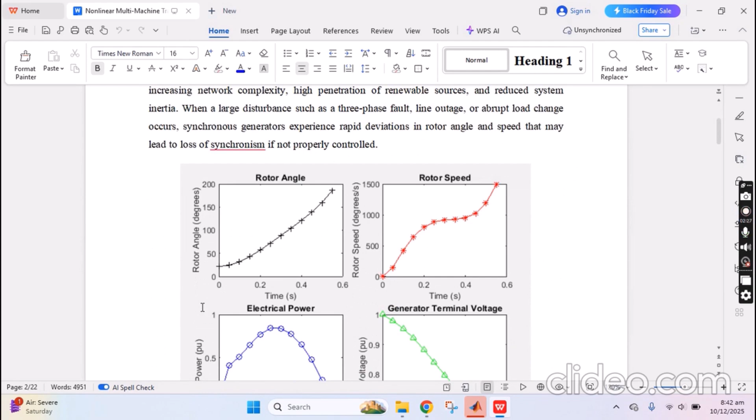I have written the complete abstract with the keywords and introduction. In the introduction, I added monitoring of rotor speed, its angle, generator terminal voltage, and its electrical power.

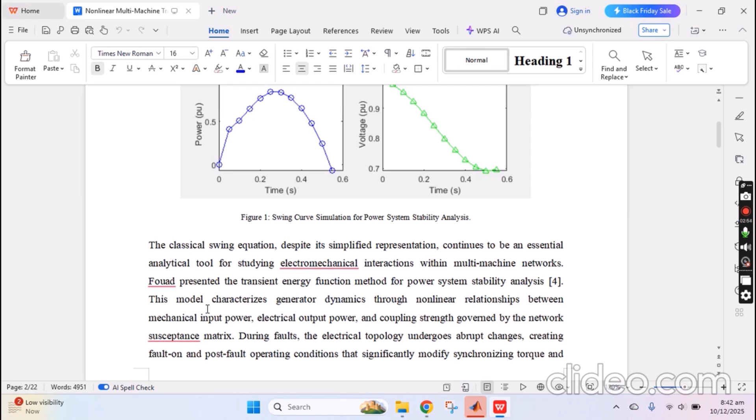During power system stability analysis, we used the Fouad algorithm. Fouad is one of the scientists who presented the transient energy function method for power system stability analysis, and in the model, generator dynamics through nonlinear relationships between mechanical input power and electrical output power, with coupling strength governed by the network susceptance matrix.

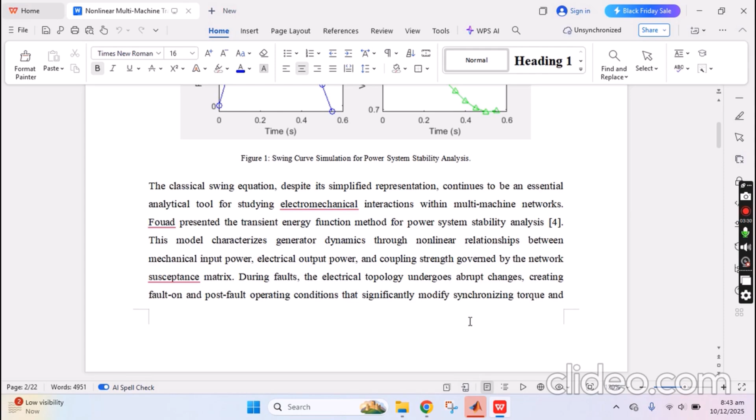During the fault condition, we also consider that the electrical topology undergoes abrupt change, creating fault-on and post-fault operating conditions that significantly modify the synchronizing torque and damping as well.

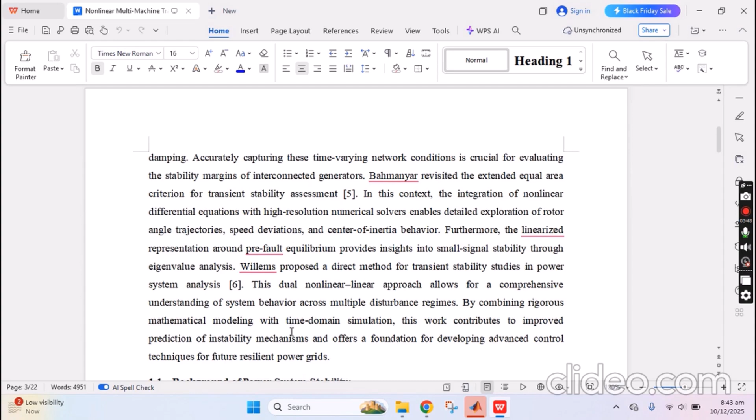Here is the complete introduction in which I detail how we linearize the representation around the pre-fault equilibrium, as well as the instability mechanism, which offers a foundation for developing advanced control techniques for future resilient power grids.

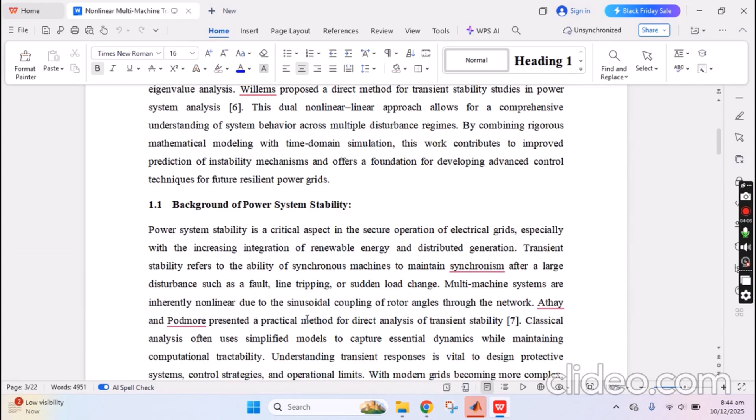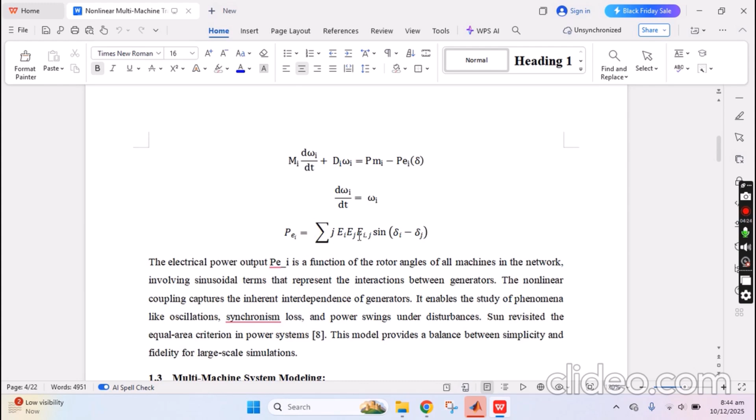Here is the background of power system stability and the classical swing equations. These are the equations I used for the power output results, for the rotor angles, and for the angular velocity. This is the multi-machine system modeling.

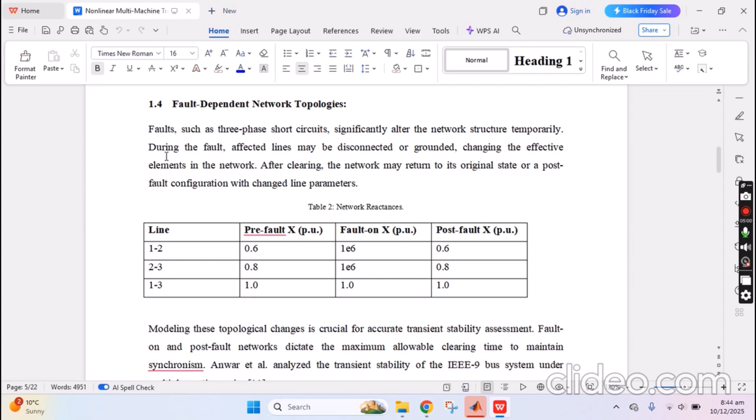These are the machine parameters used in our case in terms of susceptance, fault-dependent network topologies, and the fault dependent networks. The fault dependent networks provide the complete three-phase short circuit network topology, and during fault conditions this occurs during disconnection, grounding, or changing the effect of elements in the network.

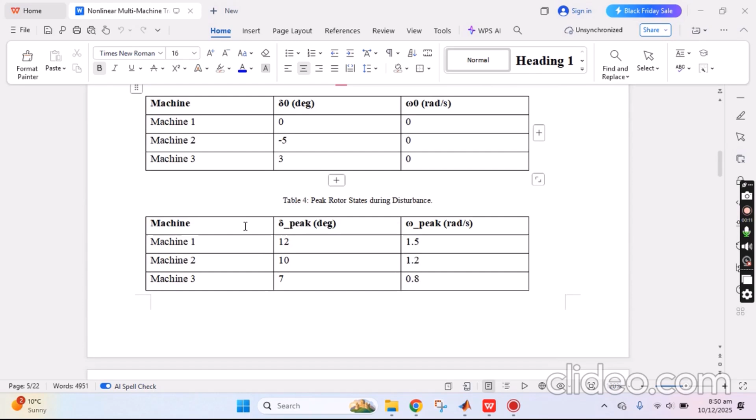Here is the table with pre-fault rotor states and peak rotor states during disturbances, along with the nonlinear dynamics and stability assessment according to swing curves of machines for various current ratings.

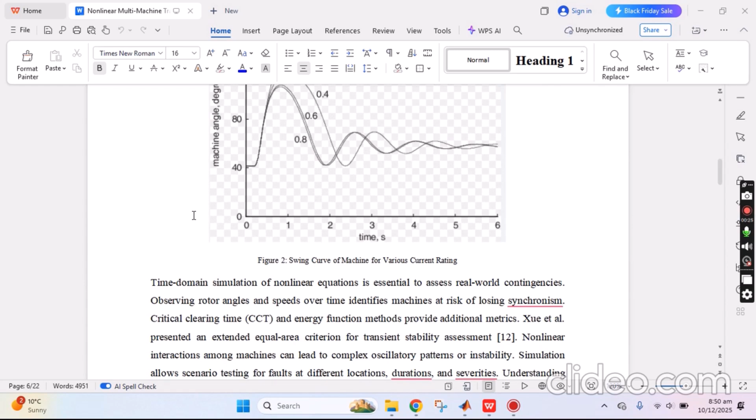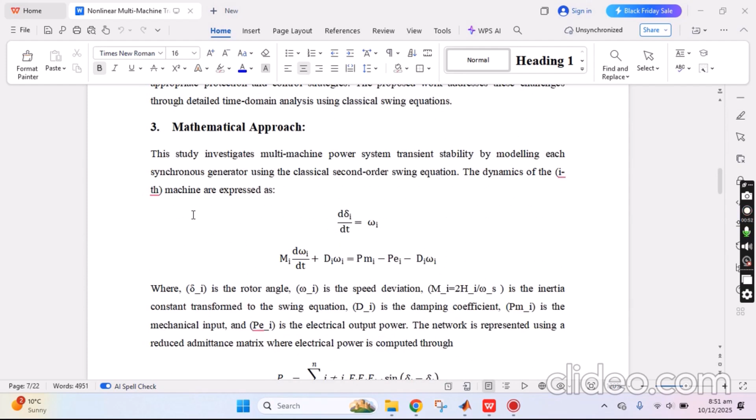The problem statement addresses how synchronization needs to be maintained, how we check for loss of synchronization, and how traditional linearized approaches fail to capture these nonlinear effects. These are the mathematical equations added here.

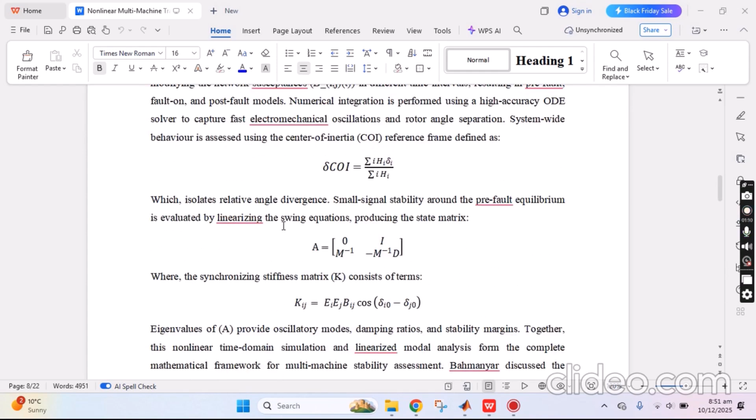In terms of electrical power, angle, speed, and angular velocity, we have pre-fault, fault-on, and post-fault models as well. These are the linearized model with the methodology. All the parameters are available in this section.

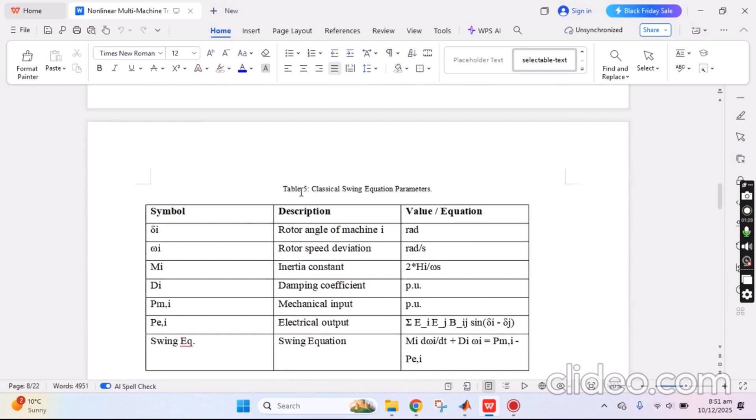These are the classical swing equations used in our section, presented in table form with all symbols added.

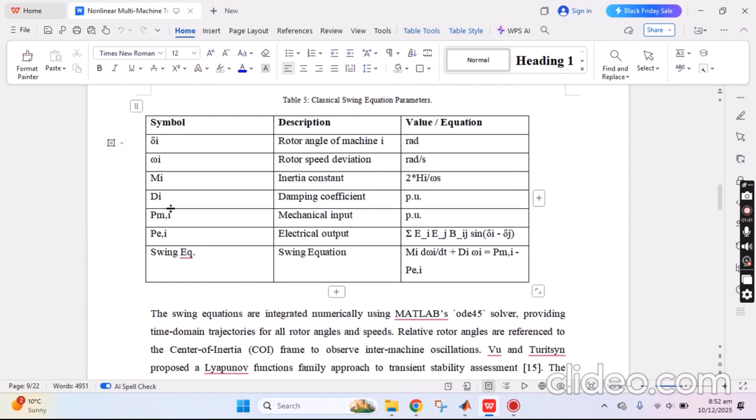We used the MATLAB ODE45 solver, providing time domain trajectories for all rotor angles and speed. In terms of MATLAB algorithm, we used COI motion and eigenvalue spectrum for fault clearing times, which varied to determine the critical clearing time, called CCT. MATLAB visualization enables detailed inspection of oscillatory patterns of potential instability.

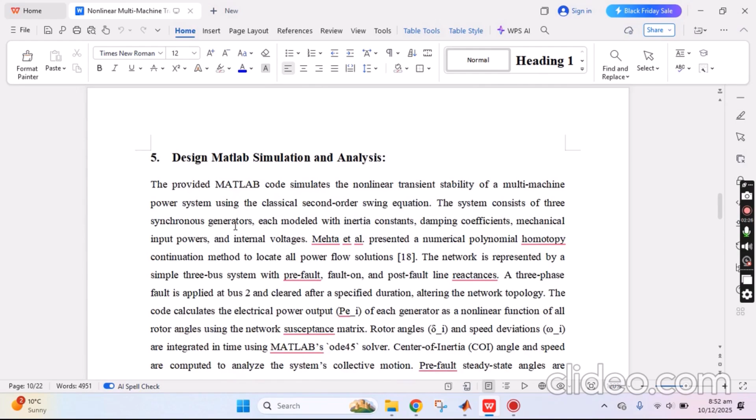The design of the MATLAB simulation analysis follows this methodology, which is consistent throughout the design and simulation approach.

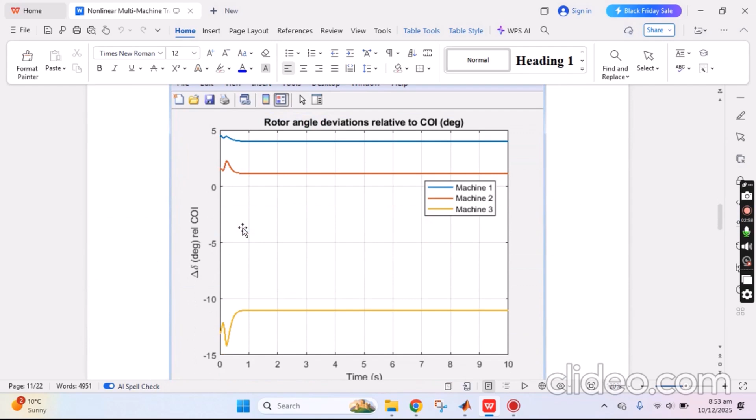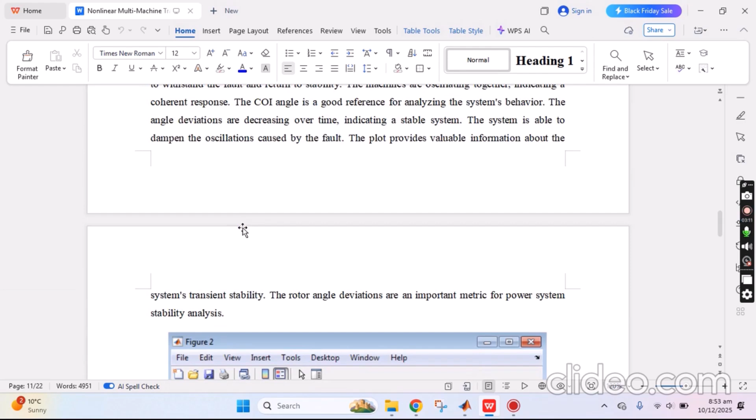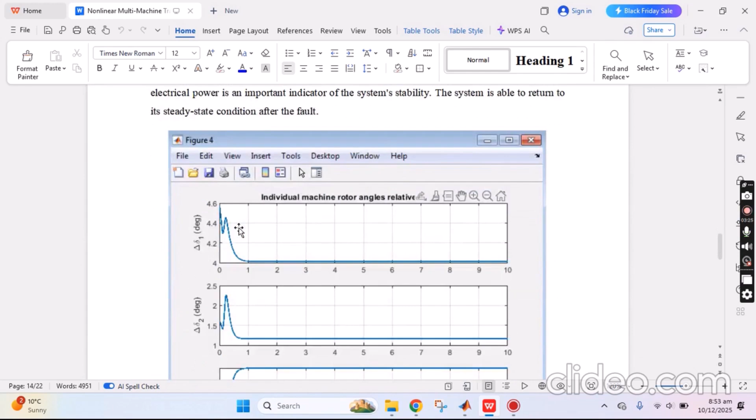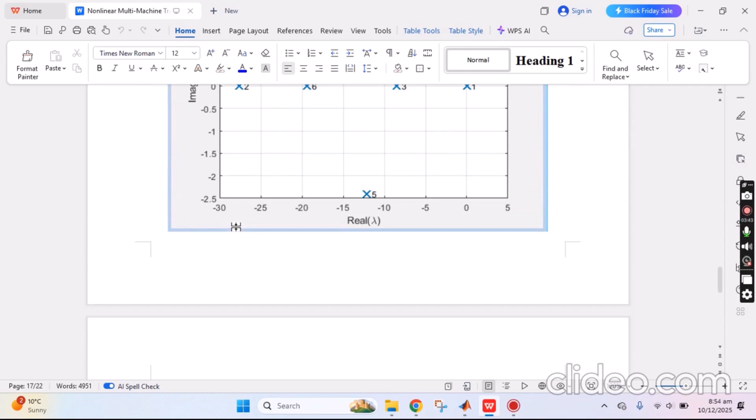Here are the rotor speed deviations, and the graph of electrical power with mechanical input PM, individual machine angles, and individual machine rotor speed deviations with center of inertia angle and speed.

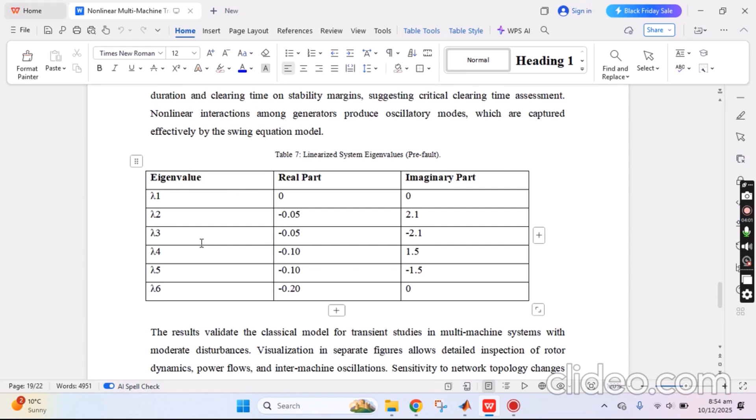Here are the eigenvalues of the linearized pre-fault system output results, with discussion of how electrical and mechanical power varies in different machines, and how the linearized system eigenvalues change through pre-fault, fault-on, and post-fault conditions. These are the conclusion and references.

Let me show you the output in terms of MATLAB simulation. These are the MATLAB code. You just need to run this section and you will get output results like eigenvalues of the linearized pre-fault system.

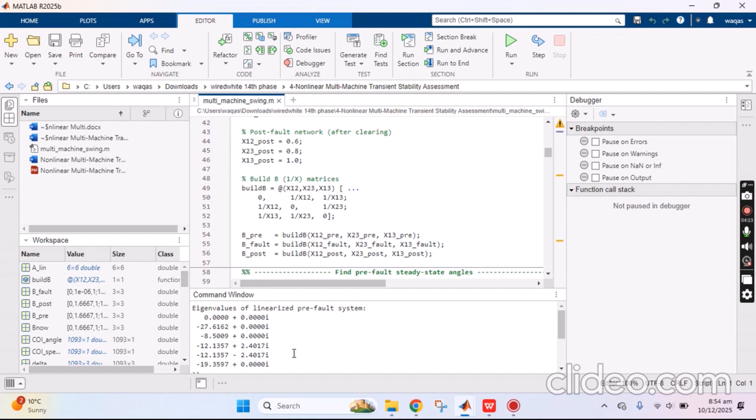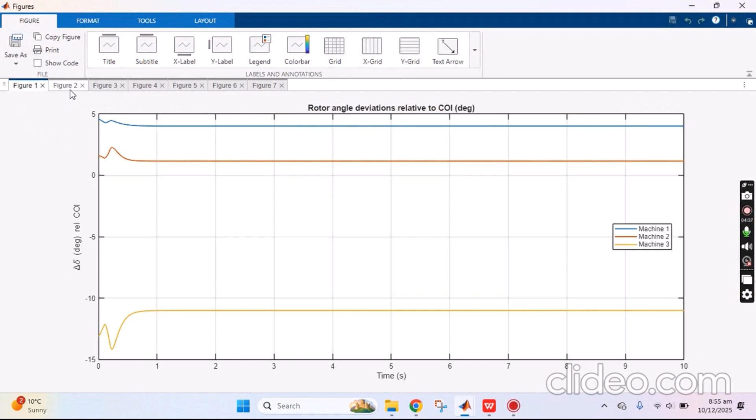This code takes some time, so I have run it before. To check the output results, here is the first figure, which shows rotor angle deviations relative to COI, center of inertia, and rotor speed deviations with electrical power PE and mechanical input PM.